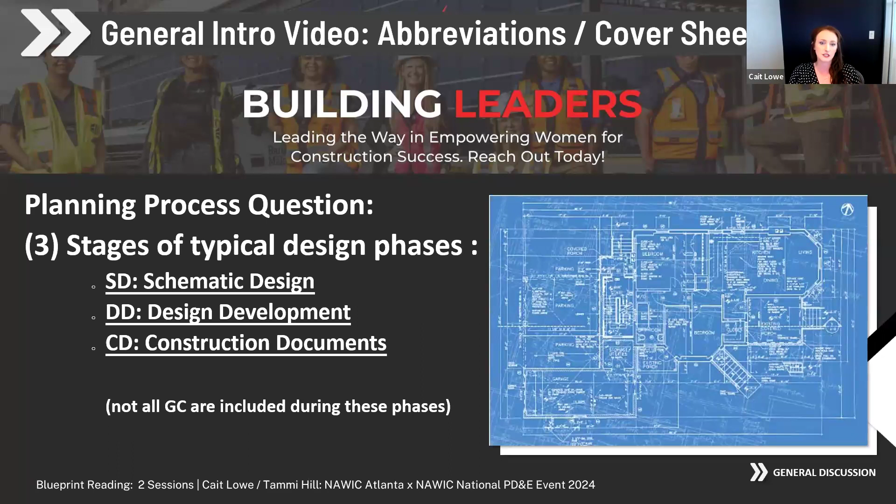And then the most popular that most everybody on this call should see is your CD set, or your construction document set. And that is a set that's already gone through all of planning, review, zoning for what we call authority having jurisdictions, that's your state, your county. It's already been looked at and approved by all your architects and engineers, stamped and ready to go.

Every discipline set, so that's either your G page, your A page, your structural, or your MEP, they're all going to have different immediate needs. So they're all going to have their own abbreviations. They're going to all have their own 00 page, which will give you basic information. And that is your engineer, your architect specifically saying, hey, contractor, hey, GC, hey, supplier, don't miss this. This is only for this set. So you're going to see the A pages have their own set of abbreviations.

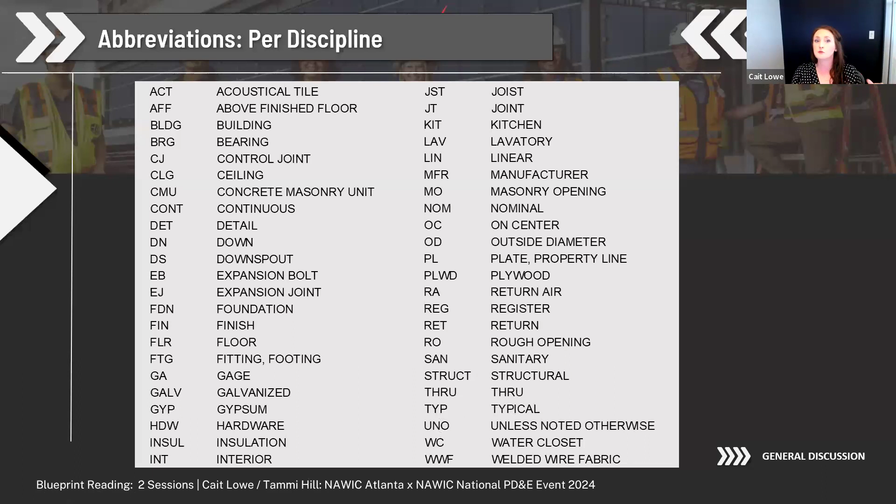So just a couple examples. ACT is your acoustical tile ceiling. AFF is above finished floor. Some really standard ones that we'll see is TYP, typical, or UNO, unless noted otherwise. Those are kind of your standards that you're seeing. They may or may not be used. They typically are boilerplate, but it's a good tip that you always want to snippet it, print it, save it, so that when you see it through your page and playing Where's Waldo, a detective, you're like, what is that? Oh, got it right here, ready to go.

So the other thing that I always really like to talk about with everybody is there are so many different viewpoints, right? So again, your architect and your engineer has to ensure that everybody is reading how to build this building the same way. So they will use the viewpoints based on that. So whether you have a CD set or a DD set, you're going to see different viewpoints. I did want to hit on all of these.

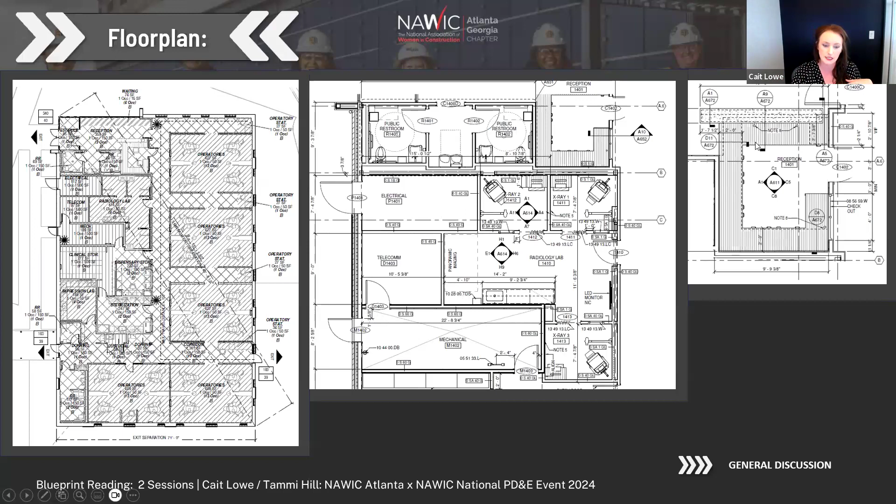And then we can even see, this is actually millwork. So it looks like a countertop and a sink. And again, all of these will be on your 00 page, and Tammy's going to talk about that, but I can see a door. So again, it's just lift up the dollhouse. And then this, I liked this one because it's actually millwork for a built-in desk for reception. So I thought that was a good one to show y'all also. So we're going to go through all of those.

So your most common view is the one we just talked about. So it's a plan view. Plan view is going to be your most common. It's looking down through the building as a horizontal slice, and you're looking directly over it. Okay, so I like the dollhouse assembly or drone or whatever y'all like to think about. So typically it is an X-ray view, as if you took the roof off and you put the ceiling off and you're hovering right above. So you can see walls, flooring, millwork, like we just talked about, equipment.

A lot of other times you're going to see different plan views, really common on the A pages or the architectural pages, and that's your roof plan where you're hovering right above the roof so you can see what's sitting on it. It's still a horizontal slice, but it's not really an X-ray slice.

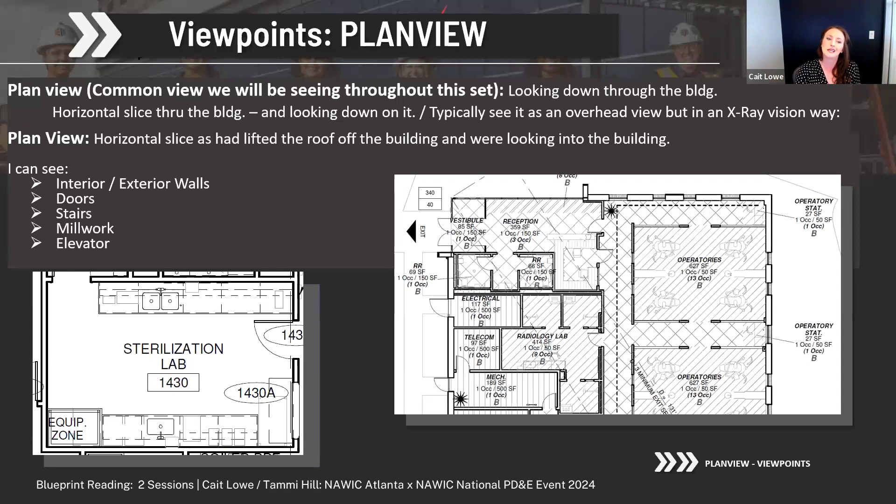Right, and then we have elevation view. So your elevation view is a vertical slice, right? As if you're standing directly in front of the building, or you're standing in the parking lot, you're standing right outside the door. So it's the exterior vertical slice, and you can see the interior elevations. You can see from floor to the roof, it tells us it's 14.5, and then to this roof screen, from 0, it's 23.3. So he gives us information, top of canopy, top of window, top of door.

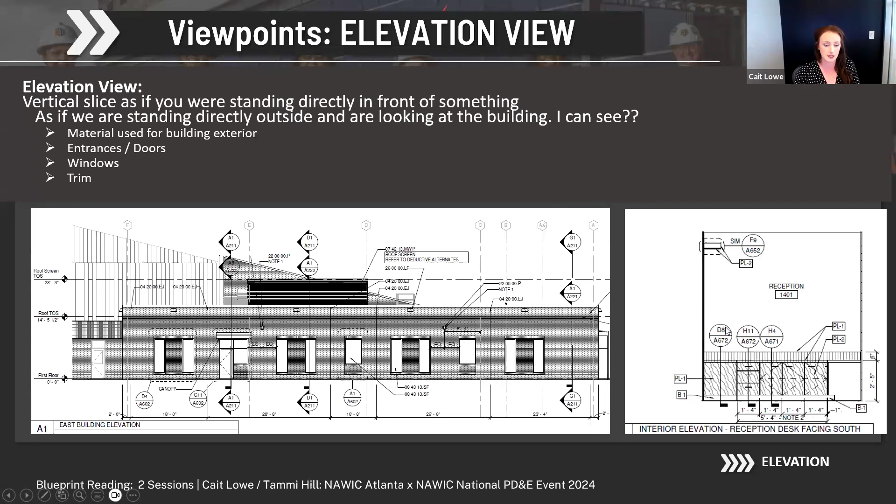But really what your elevation view is showing you is what the building's supposed to look like. What is the intention of the architect for this building to look like? And then we extrapolate or get some deeper information also from these pages. So this is an exterior, and then this is an interior. So again, your interior, this is that reception desk that we talked about. So it shows you it's got cabinets, it's got drawers, it's got plastic laminate top. So it's same POV, it's just inside the building versus outside the building. And this will always tell you the design aesthetic that they're going for.

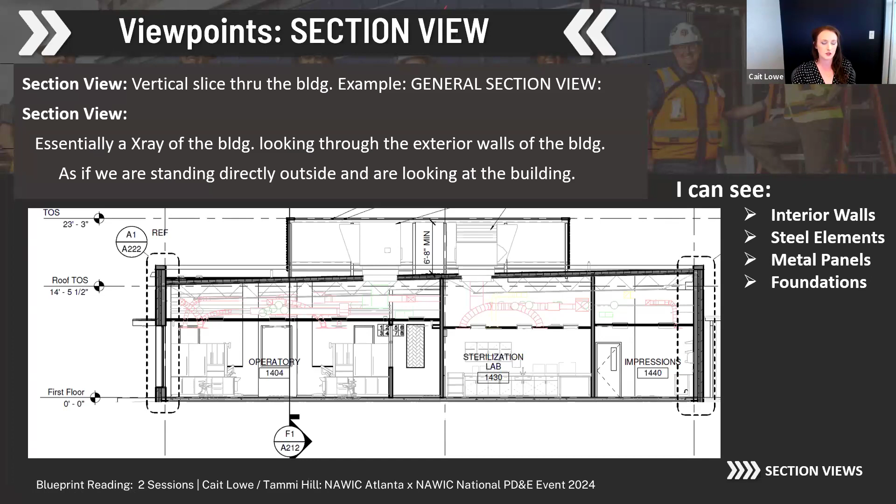The other viewpoint you're going to see is a section view. So that's an interior elevation, vertical slice through the building. So this is definitely X-rayed, right? So all we're looking at is what is X-rayed in the building. So again, it's sliced as if we're looking straight through with X-ray glasses. So you can see ceiling height, structural height, or any indicator that the architect wants to bring forward. Section views, again, it's a vertical slice, but it's a more minute part of the building. So it's essentially looking at an itty bitty part.

So I extracted this. So it showed us this whole exterior wall. And then it showed us another piece of the wall and then a further detail piece of the wall. So if we're looking at this from the elevation view, I don't have a lot of detail about the material. But if we go next, I do get some more information, and there's going to be a legend and an abbreviation for all of these. And then Tammy's going to get into all that.

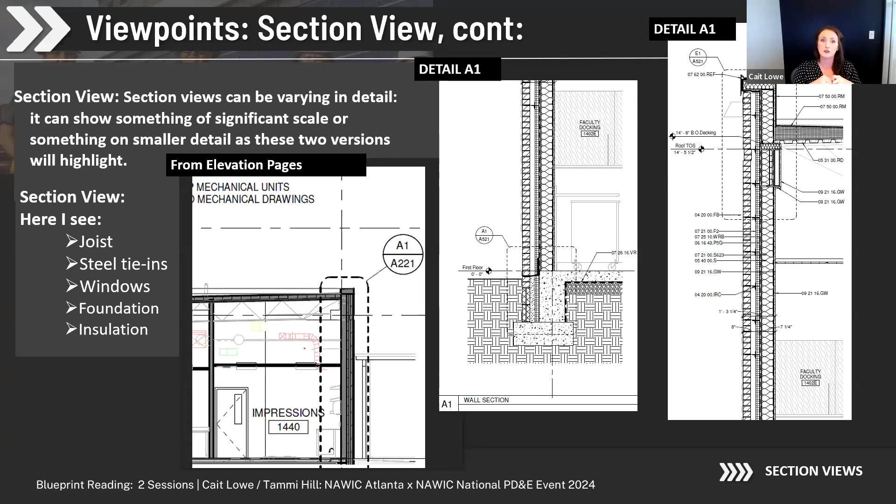But what you can see is joist, tie-ins, windows, foundation, insulation, waterproofing. You've got multiple sub-trades here. So that's kind of a way for an architect or an engineer to say, again, hey, contractor, don't miss this because you got 4 or 5 trades all in the same area. So by them zooming in to that section view, it's telling them more detail on how to construct it.

A section view is going to be more of a finite detail than an elevation view. And an elevation view is different from the plan view. That's where we're looking in and dollhouse up. So again, we're playing Where's Waldo throughout, but these are where you find your clues. So if you skip over the detail in the sections, you're missing money.

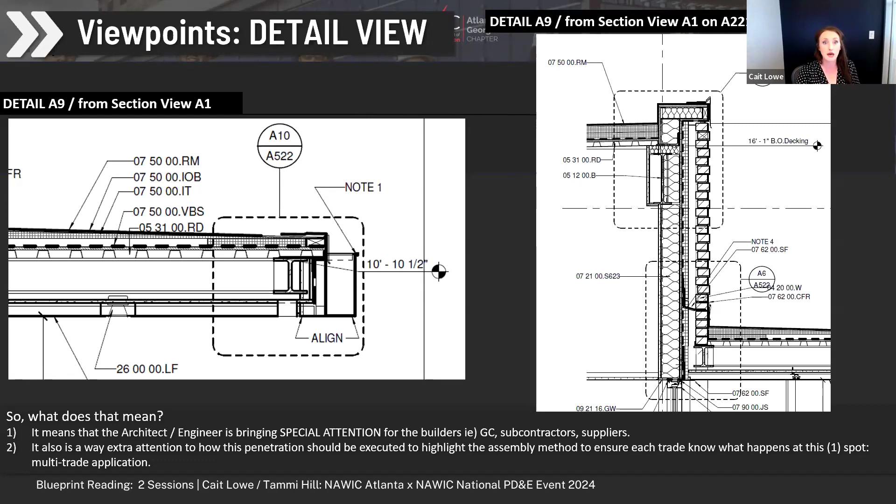Okay, another thing that we're going to see are schedules. So the most common schedule are room finish schedules. It'll tell you room number, room name, flooring, wall finishes, and then door schedules. So again, it'll give you door information, a lot of different door types, hardware schedules.

Every discipline will have its own set of schedules. Your mechanical schedule is different than your electrical schedule. Your finish schedule is different than your roofing schedule. Your roofing schedule is different than your steel schedule. So you're always going to look in those specific disciplines.

But again, that's just a way of the architect and the engineer saying, hey, Mr. Contractor, Ms. Contractor, do not miss this. This is important. It's just for you, very project specific.

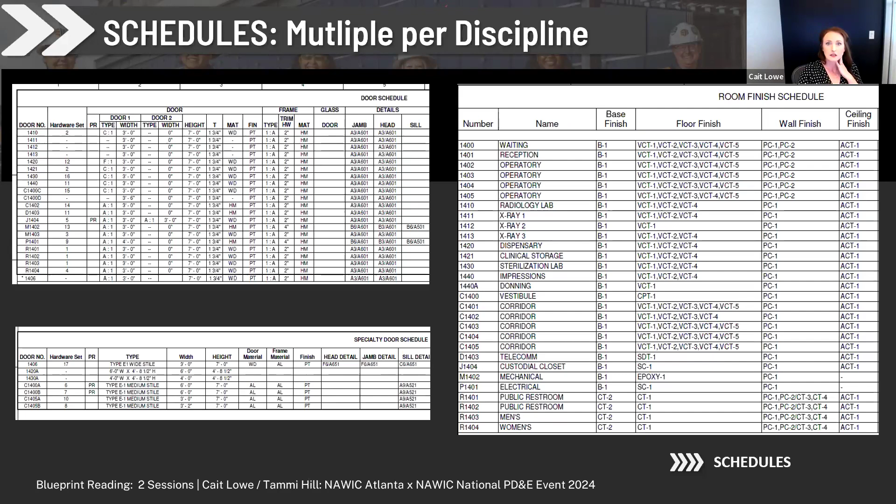Thanks, Cait. So now we're going to jump into the actual drawing set. We're going to be looking at a live PDF set, and today we're going to be covering the architectural and structural drawings out of this set. So please do put on your calendar and join us April 9th for our next session, where we'll be taking a deeper dive into the mechanical, electrical, and plumbing drawings.

So the architectural set that we're going to look at first, that is where we're getting all of our building organization information. The architectural set is going to show you the space layout. It's going to show you where the walls go, what materials the building is made of, and how you get in and out and move around the building.

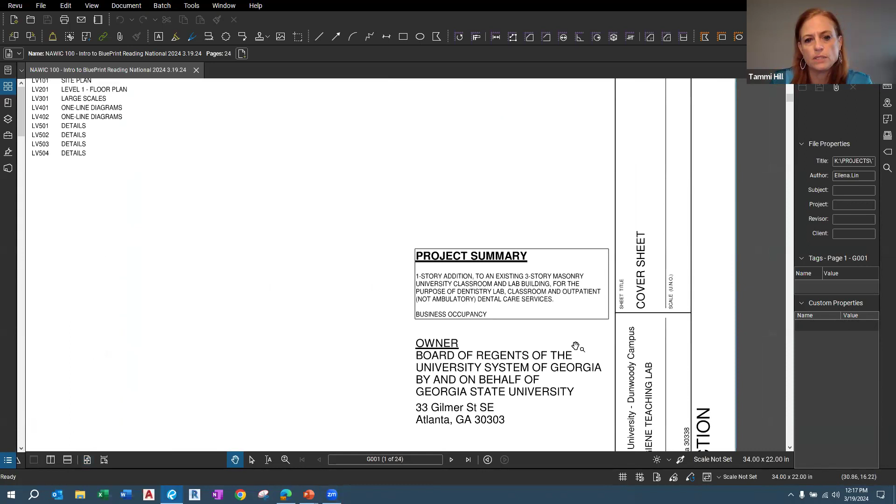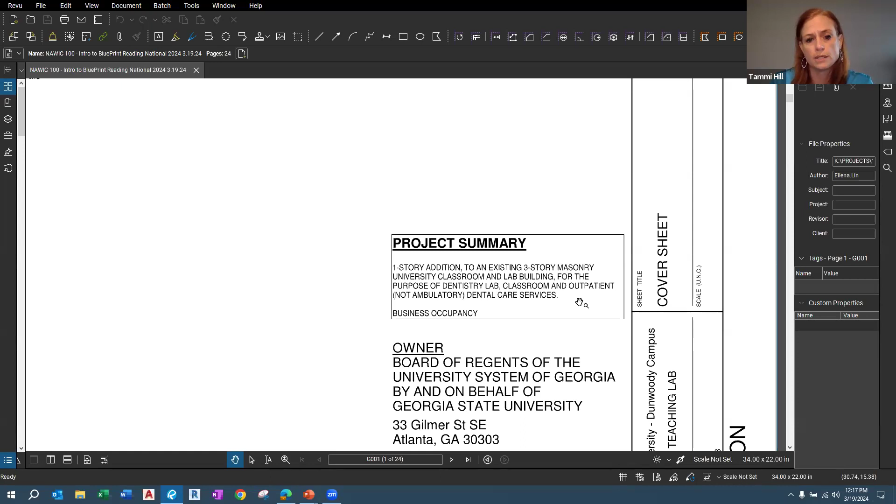So Cait touched on the cover sheet, a lot of really good important information here. One additional thing I wanted to note, sometimes this is on the cover sheet, sometimes you'll find it on the life safety sheet, but the architect will typically give you some sort of project summary, which is just a general description of what the building is. So in our case, we know we're building a single-story addition to an existing building. So that's what we're going to be looking at today.

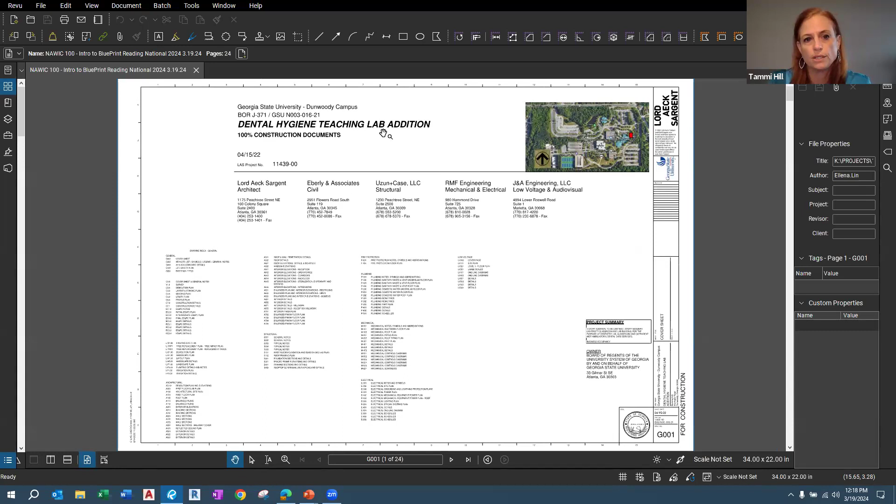And we know this is a dental hygiene teaching lab. So those are some clues as we're looking at things and wondering what is that? We can be thinking about what would you find in a dental lab, or at your dentist's office. So this is what that full page of abbreviations looks like. Really important information, and Cait's absolutely right. You want to have this handy at all times as you're flipping through this set, because you're going to be referring back to these abbreviations a lot.

It's also important to note these symbols and this legend here. This also gives you additional information about what you're looking at, what these different tags mean. Building components are going to have different tags that can tie back to schedule information that Cait was showing us, that gives us all of that additional information. So it's important to know which specific door are we looking at when we're looking at the door schedule.

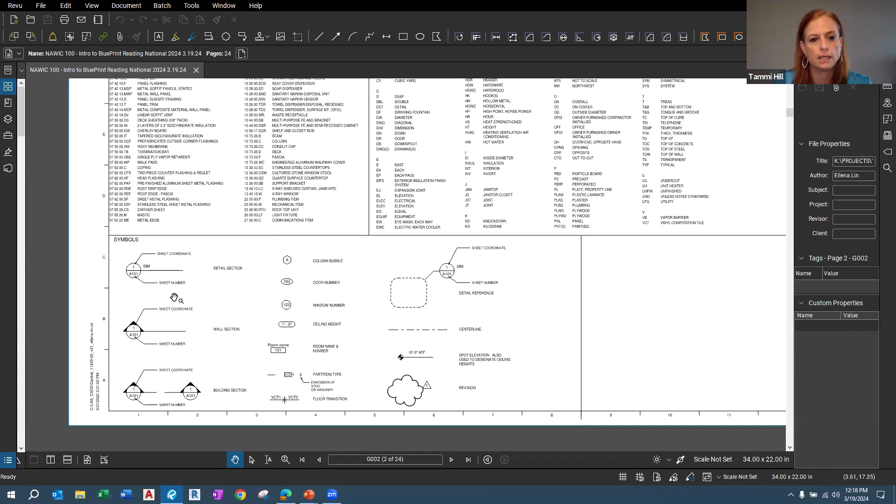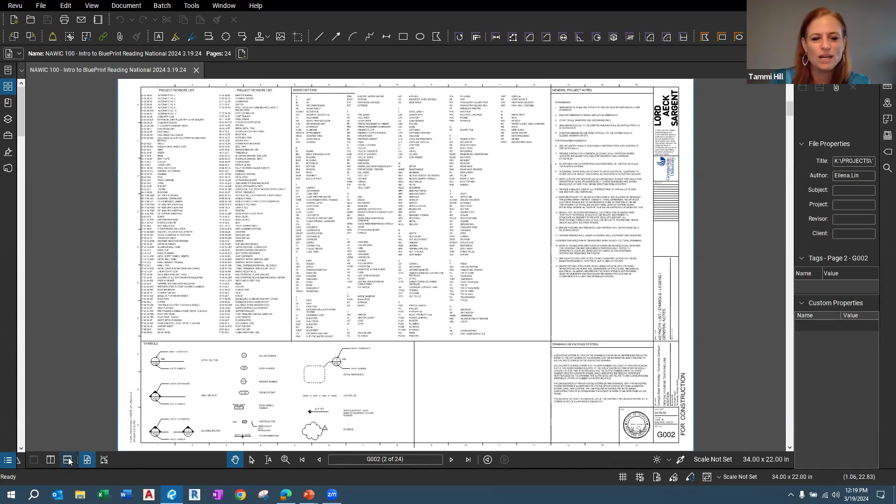And we can see where those section cuts are taken, where those slices through the building are taken, and where the elevations are, which wall exactly are we looking at. So really important information on this sheet. A lot of these symbols are industry standard, but it's important to make sure you're always looking at your project specific ones, because as architects, we do like to occasionally get a little bit fancy. So it may not be consistent from project to project.

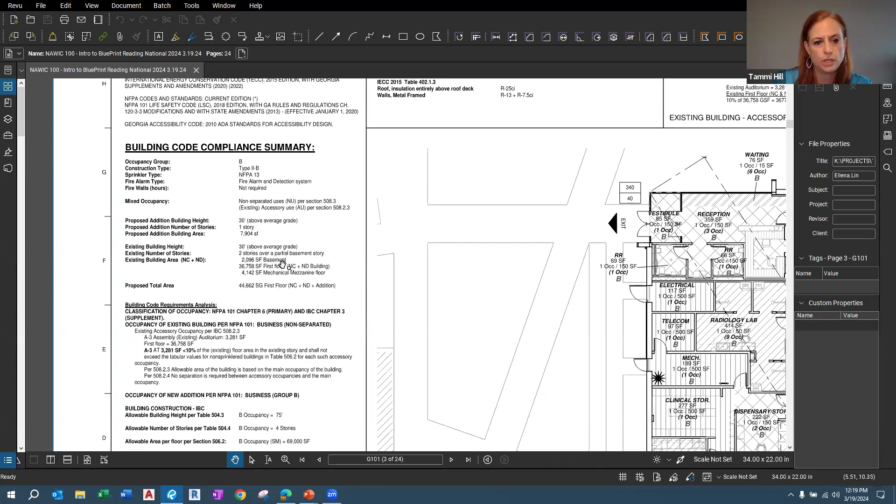So this is your life safety plan. And there's a lot of good information here. It's not just code related information. It shows you the general arrangement of the building. It shows you how you're going to get in and out of the building. But there's also good information about the building itself, about what construction type it is. And you can also find your square footages here. So if you're doing takeoffs or estimating, really good, quick and handy reference information to find on this page.

Now our overall floor plan. So this is showing us, again, that dollhouse view. We've taken the roof off and we're looking down on it. So this information is showing us our layout. It's showing us our dimensions. It's showing us where the walls go, what the walls are made of.

We've got some tags that reference back to schedules that show us the door and window information, and it's going to be providing us the locations of references where we can find more detail.

Now, the important thing to remember when you're looking at these sets, there's a lot of information here. There's a lot of lines, symbols, and tags. When you're first looking at it, it can be really confusing. But the important thing is just remember, take it one piece at a time. Allow yourself time to flip back and forth through the pages. You're going to be doing that a lot as you're looking at the different sets, going to look at granular detail, coming back to the floor plan to orient yourself, moving on to the next piece. So really allow yourself that time.

So here we see we've got some section cuts that show us the slices through the building. We've got some elevation views that show us, as we're looking at the building at that exterior wall, we can see those symbols. We can also see these dashed lines highlighting certain areas that show us there's some additional information in an enlarged view with more granular information. So when we're playing Where's Waldo, we like to think of these as our side quests, where we can pick up some extra coins and really get a lot of extra information.

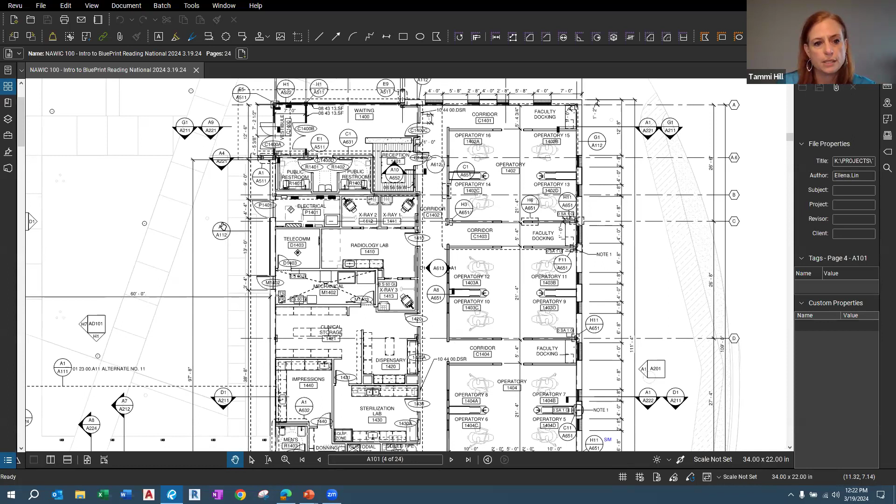So here's your Bluebeam hack for the day. If you didn't know Bluebeam could do this, you can ask your architects when they print the set to hyperlink, to check the box that hyperlinks all of their tags. And what that will allow you to do is click directly on the tag and it'll take you straight to that page. So that's super handy when you're trying to save time flipping back and forth through all of the pages.

So we were looking at that G1. We can see here in our detail title, we found the G1. It's an enlarged plan, so it tells us what type of view it is. And we can see here, as we're looking at this, now we can start to see some graphic representation of our different materials. We can see our doors.

Our doors will typically show us the swing, so it shows us which way the door is opening into or out of the room. We can see our tags a little bit more clearly now because we're looking at a larger view, so things are a little bit easier to see.

We can also see some of our windows, so we can see what our windows look like. We have two different types of windows on this project, so they're shown slightly differently, but we can see that graphic representation. We can see our mullions here, which are the vertical or horizontal pieces that hold the different panes of glass together.

We can see our wall types, so we've got some tags that reference what our wall types are. And as you look at these different notes, you'll also see that there's some specific notes.

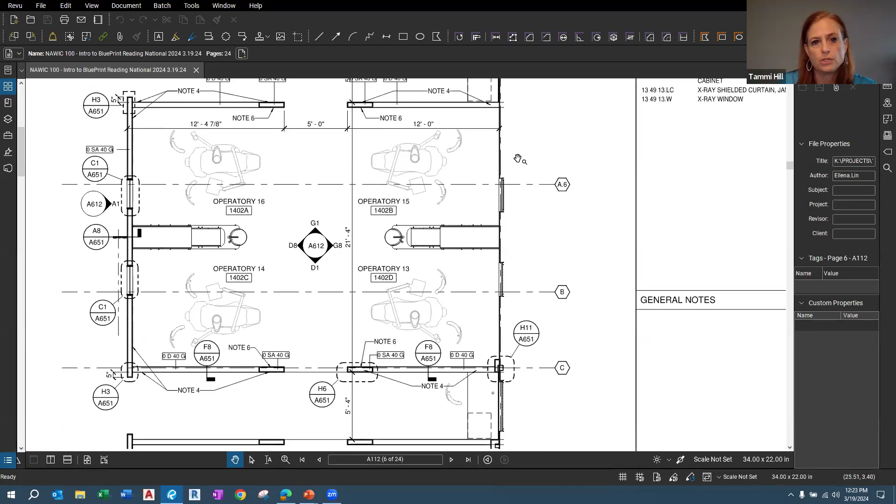Now, what's important to know on each page as you're looking at it is that there are going to be page-specific or sheet-specific notes and keynotes. So in this case, for example, this says note number 6. We know we have some sheet-specific notes. We can go here, see note number 6 is a coat hook. That's important information. It may seem like a minor detail, but when the building is finished and the owners walk in and don't have a coat hook, they're not going to be very happy.

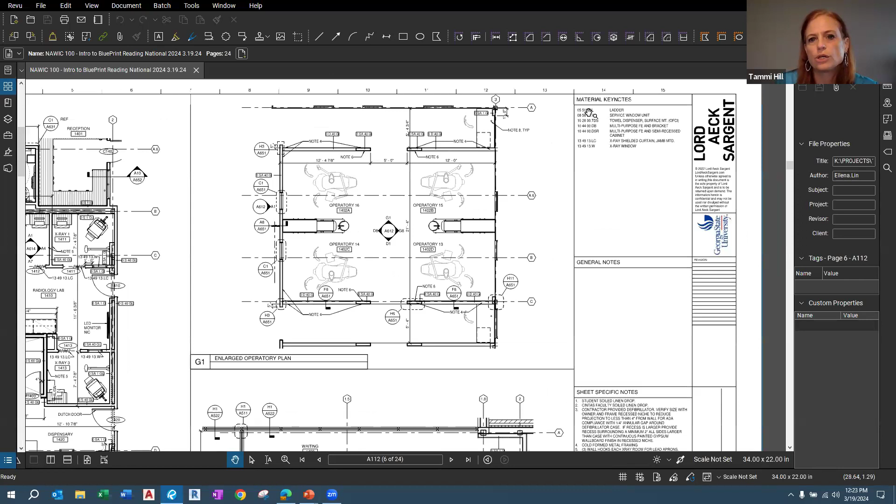So it's really important to pay attention to the sheet-specific notes and then look at your keynotes. Keynotes are what the architect will use rather than having to type out the same note every time and really clutter up the sheet with a lot of words. They'll use keynotes and then provide a legend that tells you what the different elements are that they've noted. So do pay attention to those items.

Again, we're drilling into greater detail now. So we talked a little bit about this, the millwork that Kate highlighted for us earlier.

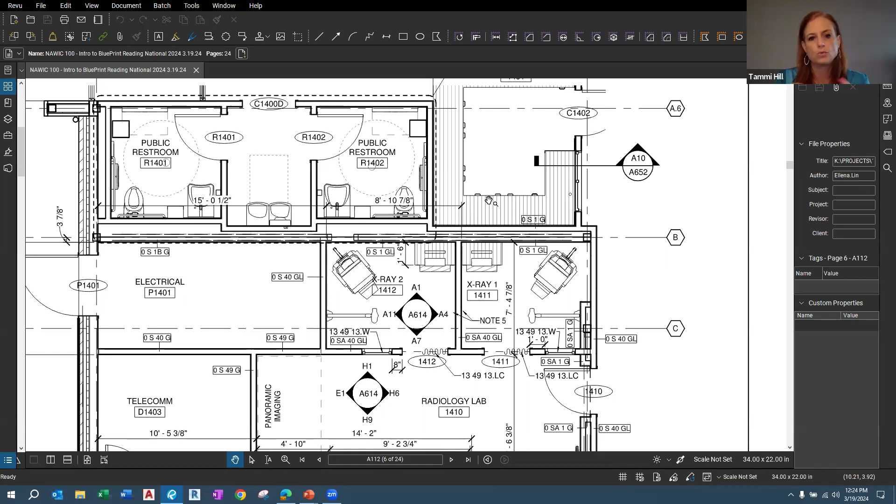So you're going to see a lot of dashed lines on the drawings, and they all kind of mean different things. It could mean something's not in contract, it could mean it's something that's overhead, or it could mean something that's down below. We'll also use dashed lines as architects to show what our clearances are for accessibility. So it's really using that drawing set as a whole that gives you the clues to understand what the particular dashed lines mean for each thing.

So in this case, we know there's going to be an interior elevation of this millwork. We looked at it a little bit earlier. You may have caught that there were some section cuts that'll give us some more detail, so we can drill down into those specific components to make sure we understand what all those dashed lines are referencing.

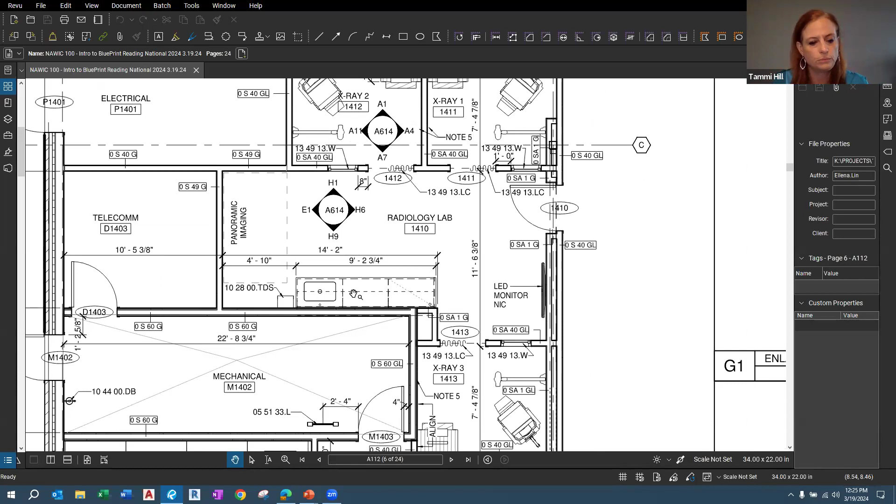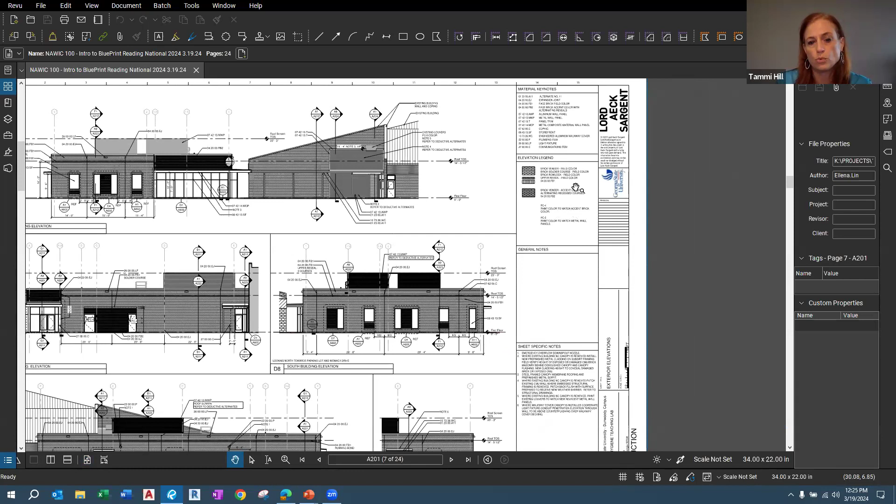So now on our elevations, we're going to flip over to an elevation view, which Kate talked a little bit about earlier. This shows us our building heights, so we have some actual heights noted, and it shows us our materials. Again, on this sheet we have specific keynotes, as well as a specific legend that tells us what our different materials are. So when you see the different kinds of hatching, you can see exactly what types of materials those are, as well as typically what colors. Those are the kind of things that architects will note on elevations.

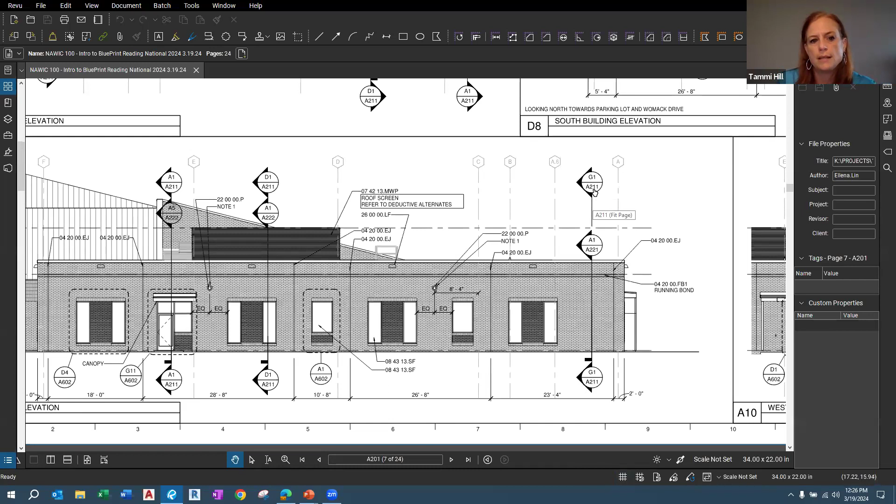Another industry standard thing to know: when you see section cuts, if you see a double-headed section cut, both of these reference the same one, that G1, that is actually a building section. Wall sections are going to be noted with a single head and this short little stubby tail at the end. So that's a clue as to how to tell the difference between the building section and the wall section. So we're going to jump over to a building section, which is this D1.

Right here in the middle we found our D1. We know it's a cross section, and again, this is a slice through the building. So this gives us a sense - we looked at the plan for a sense of the layout arrangement, so the sections give us a sense of the vertical arrangement. What is the space doing vertically? What are the different ceiling heights doing? We can also start to see some of the building structure here, getting a little more detail.

And we can see the MEP system here above the ceiling, all of the ducts and the pipes and everything that's running up above the ceiling. Not necessarily typical for an architect to show this, so you may see it, you may not. But please do join us for our next series where we dive into a little bit more on that MEP.

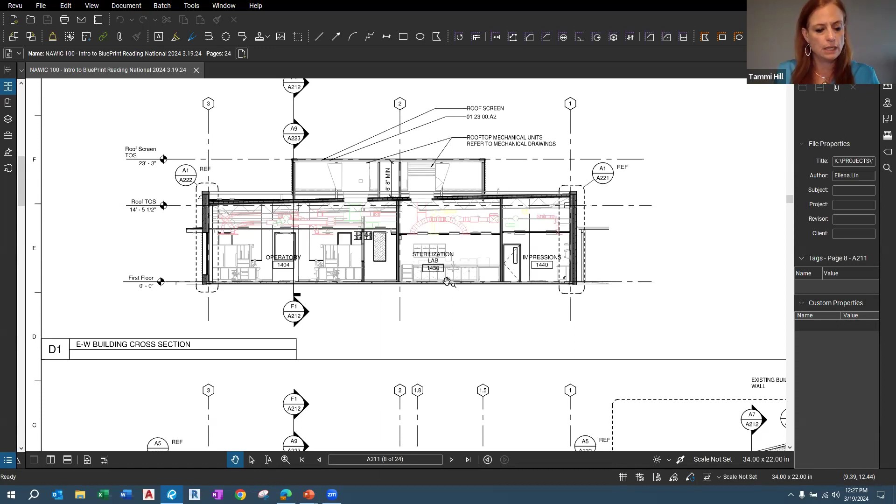So now we are going to go to a wall section. The building section kind of gives us a big picture view vertically. The wall section, as Kate mentioned, now we're drilling down even more into that detail and gives us more detail about what the actual wall is. So this is a vertical slice just through that wall.

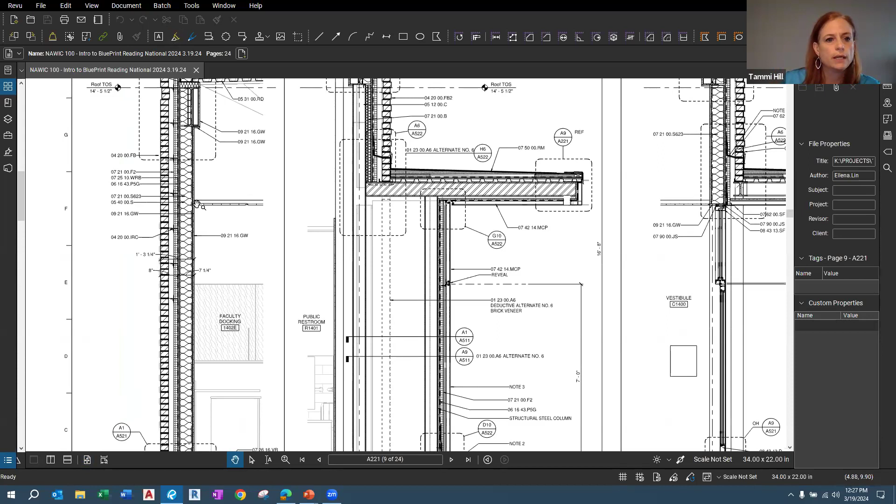Again, can be confusing, a lot of information here, but we can rely on our keynotes to see what our different components are. We know we've got some batt insulation, we've got some gypsum sheathing, we've got some studs, we've got some sheet specific notes to pay attention to. So now we can start to see really how that wall assembly is being structured and what the different layers are in that wall.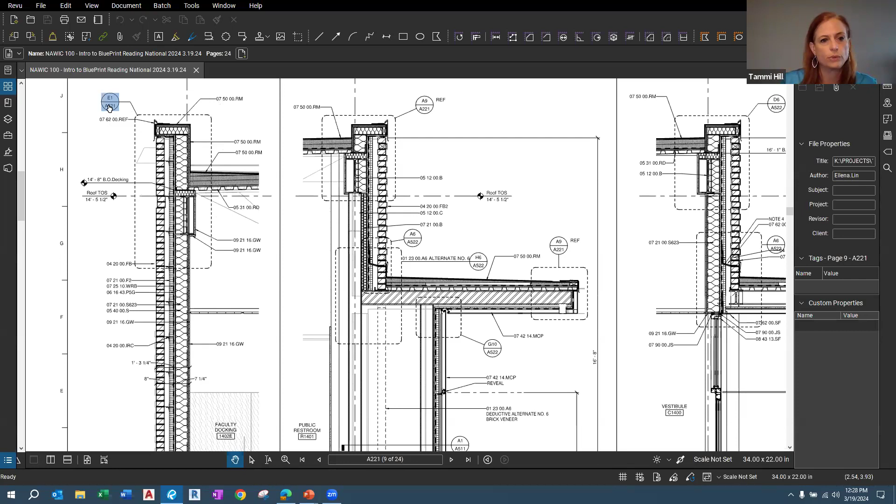And then we can drill down even more. We have some enlarged details. So we have a clue here, right? This is that callout that says, hey, there's even more detail if you go and look at this specific detail. So if we click on that, we can now see we're getting even more detail. This shows us how all of the connections are being made and how everything is being finished. We can see the structure here, we can see how it's being finished.

So again, as we get deeper into the set, we get to see more and more detail. Our details are kind of big picture details here. These enlarged details can be either a plan, a section detail like we see here, or it could be a plan view. So you may see on a floor plan there's a callout for a small area, and it can show you how a lot of different walls are intersecting and how those connections need to be made.

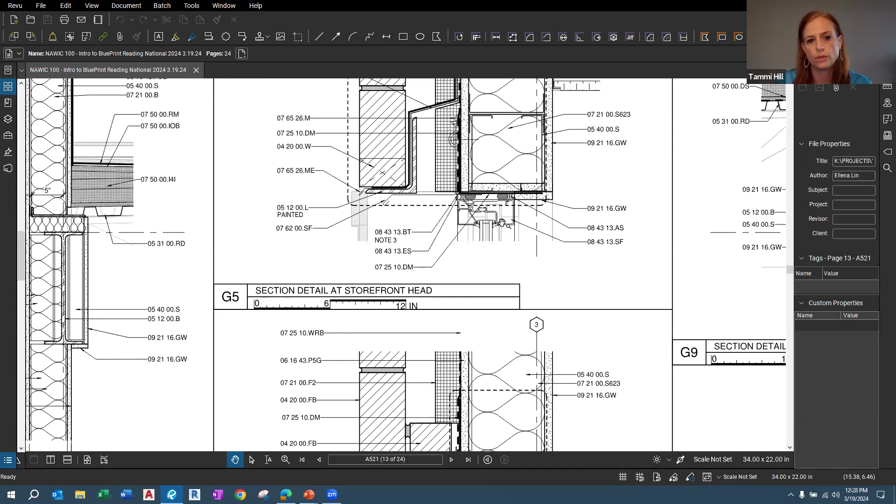You'll also see details for how windows are installed. So we can see here how the window is going to be installed and how it's going to be made watertight. So we've got some caulking and some different things going on. So all good information to have.

So we touched briefly on schedules. Again, we have more detailed information here. So the schedules are really specific information about specific components of the building.

So in this case, it's the door. We saw the door tags on the floor plan. Now we can come to the schedule and say, okay, that door 1410, we can see a lot more specific information about that door. It gives us information about what kind of hardware it has, how big the door is, the width, the height, what the door is made of, and the finish of the door.

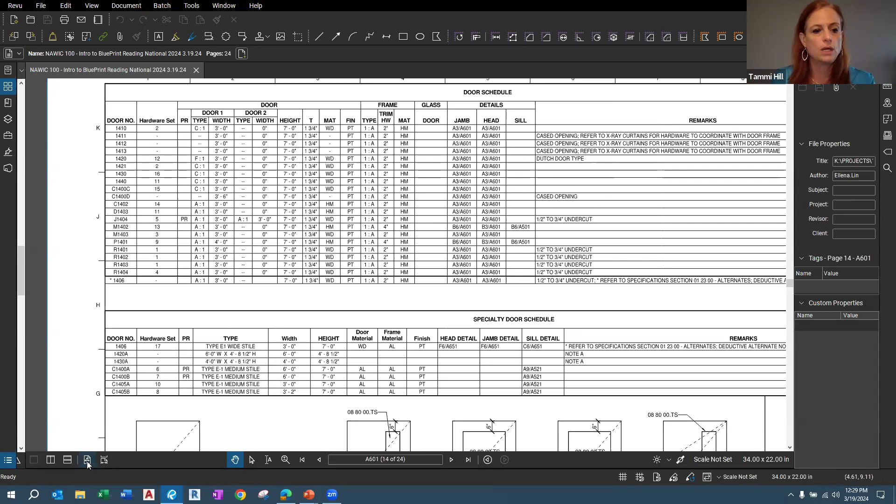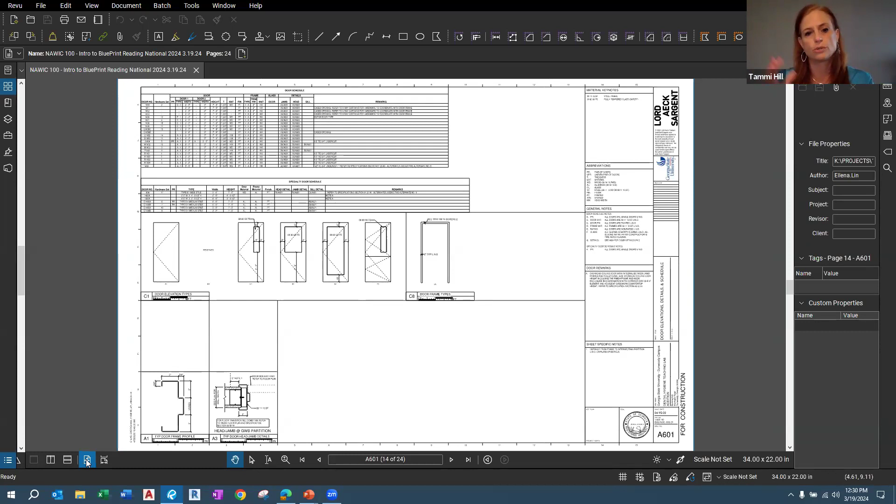Really specific information that you're not going to find elsewhere in this set. As Kate said, each discipline will be scheduling different things. In the architectural set, you'll see door schedules, maybe a window schedule, a schedule for all the room finishes that tells you what goes on what wall, what paint, what carpet, what ceiling. Then the other disciplines will be scheduling their own specific building components, so MEP scheduling equipment, structural scheduling their columns and foundations.

So we'll flip over now to the interior elevations. Just like our building elevation view, now we're standing inside the room and just looking at the wall and seeing what's going on that wall. So the interior elevations will show you things like wall coverings and finishes. If you have tile, it's going to show you where the tile goes. It's going to show you plumbing fixtures and what various heights those need to be mounted at.

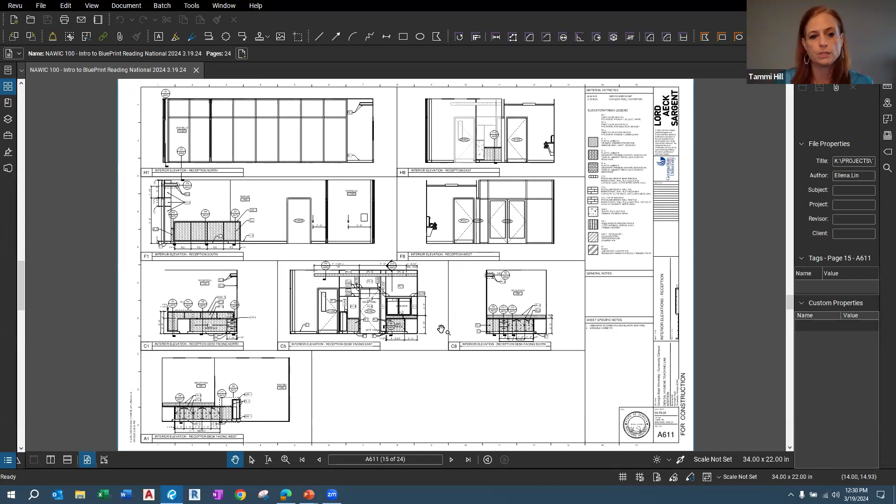And in our case here, we've also got some millwork or cabinetry that's going in. We looked a little bit at the reception desk. We can see we've got some dimensions and some information on finishes. Again, we have a sheet specific legend that we can look at that gives us those Where's Waldo clues to know what those different materials are.

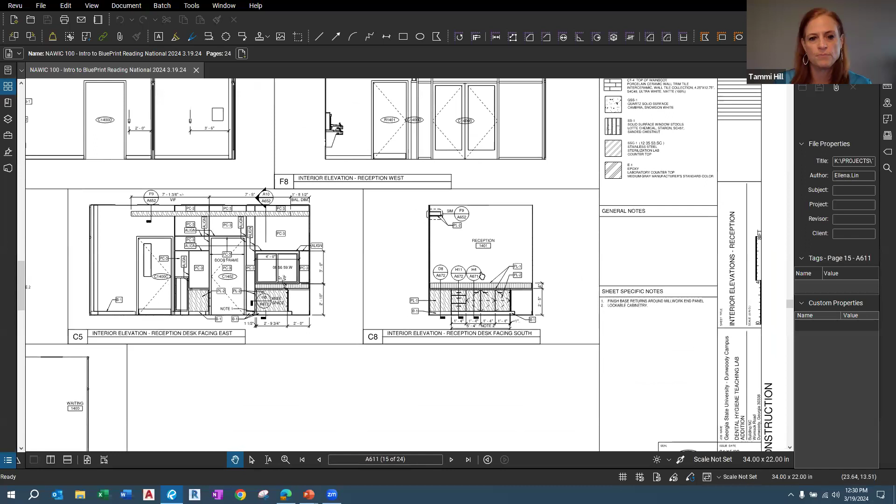And again, we can see we've got a call out for a section that shows us even more detailed information on that cabinet. If we were to go to that, that's H4. Now we can see how all of those pieces come together and how that cabinet is supposed to be constructed. So again, as we get deeper into the set, we're getting more and more granular on that information.

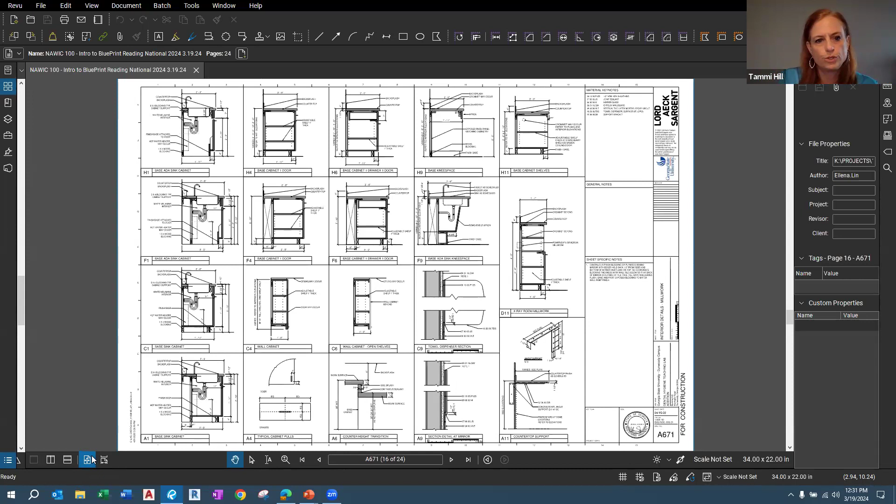As Kate said earlier, each discipline is going to have their own specific set of abbreviations, so what you see on the architectural drawings may not apply to structural or mechanical. Some may overlap, but some are going to be very unique. The other really important thing I want to note about the abbreviations is just because you see it on the page doesn't necessarily mean it's going to be in the set.

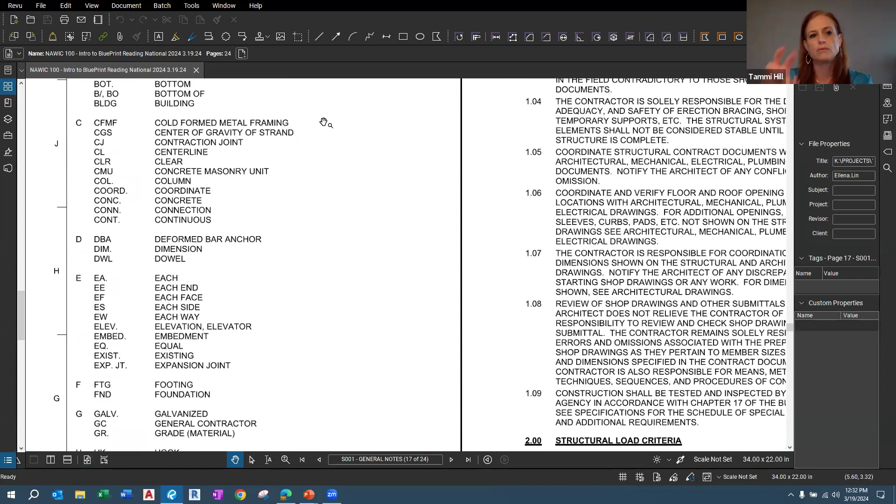For this example, cold formed metal framing doesn't necessarily mean we have cold formed metal framing on this project. This is really your reference back, so that if you saw that CFMF anywhere in this set of drawings, you can come back to this and see exactly what that is.

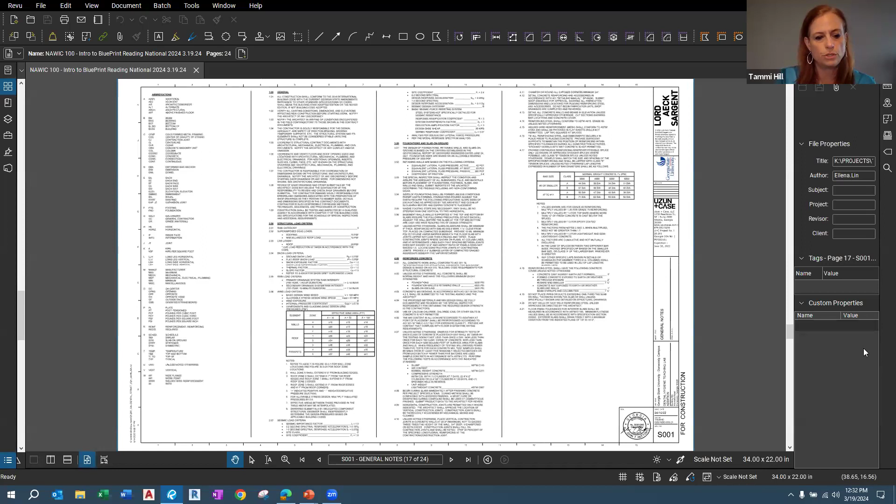So Cait, I'm going to let you jump into the concrete and the foundations. Perfect. Thanks, Tammi. Okay, so I'm going to grab over here, screen share. Sorry, guys. Hey. All right, so can everybody see this page? Yes. Tammi, can you see it? Okay, perfect, gotcha.

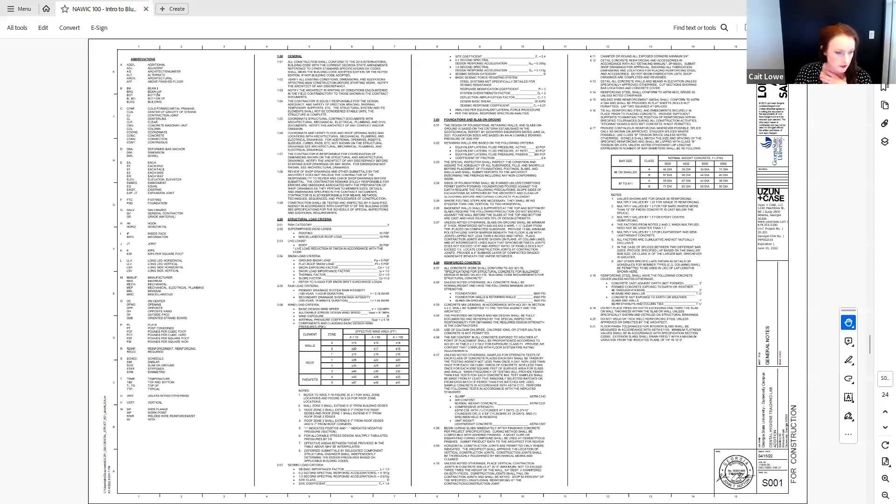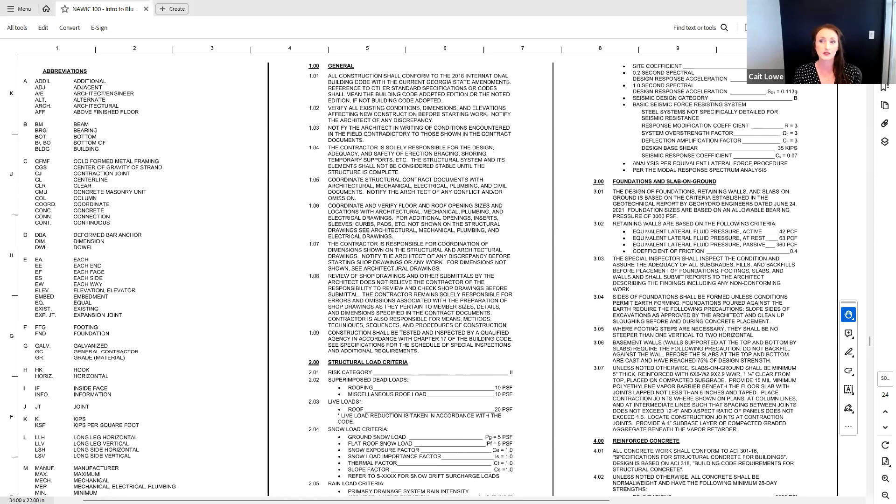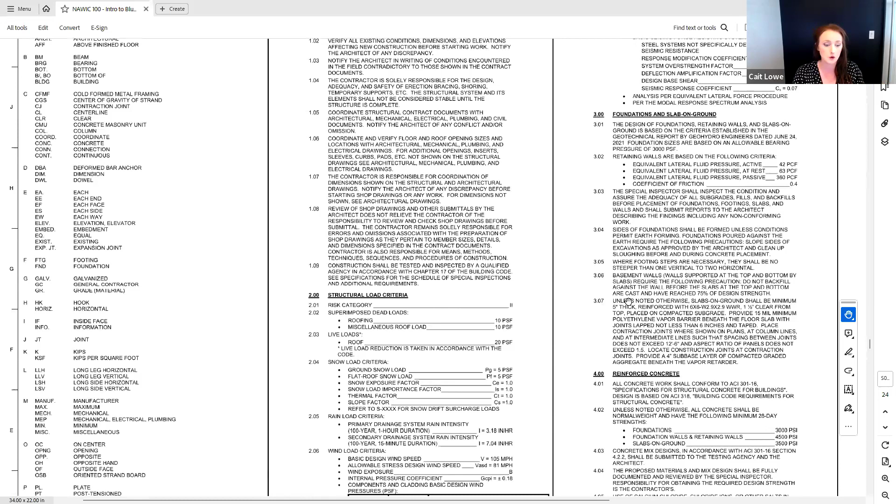I'm going to talk about concrete. So he'll talk about everything that is absolutely crucial, necessary, and an absolute must in regards to concrete. So you'll see, again, multiple trades mentioned. So on structural pages, we're going to see concrete contractors, roofers, waterproofers, steel erectors, wood framers, masonry, but also your MEP subs are looking at these too to make sure that they have weight distribution for the skeleton of the building for really heavy materials. So we'll see that also.

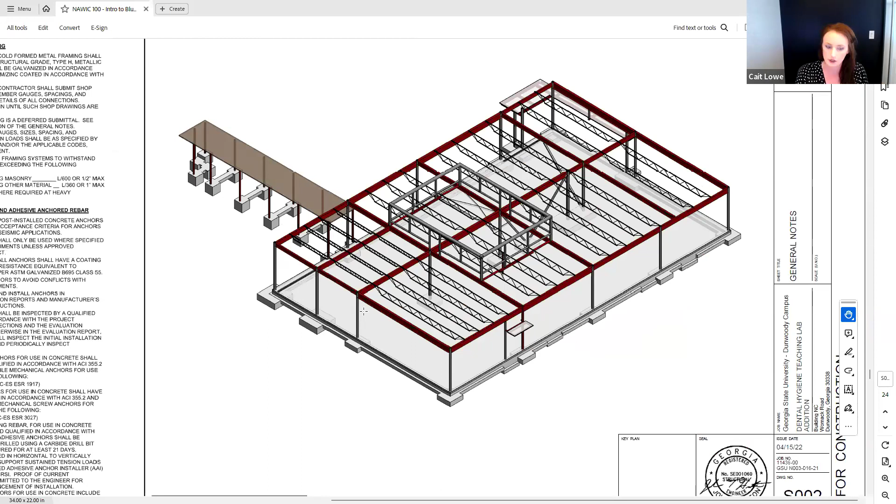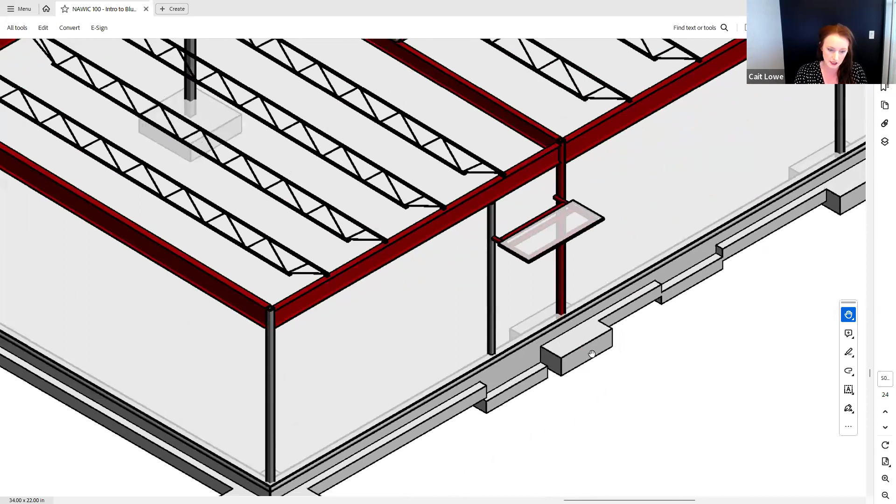So we can see the concrete foundations. That's what these are going around. So your concrete foundations, and it's got a turn down foundation. Okay, so it's just going all the way around. You can tell that it's really here to support the steel and the roof. And then it kind of dips down, which tells me something's happening there. So I'm like, okay, mental note, where's Waldo?

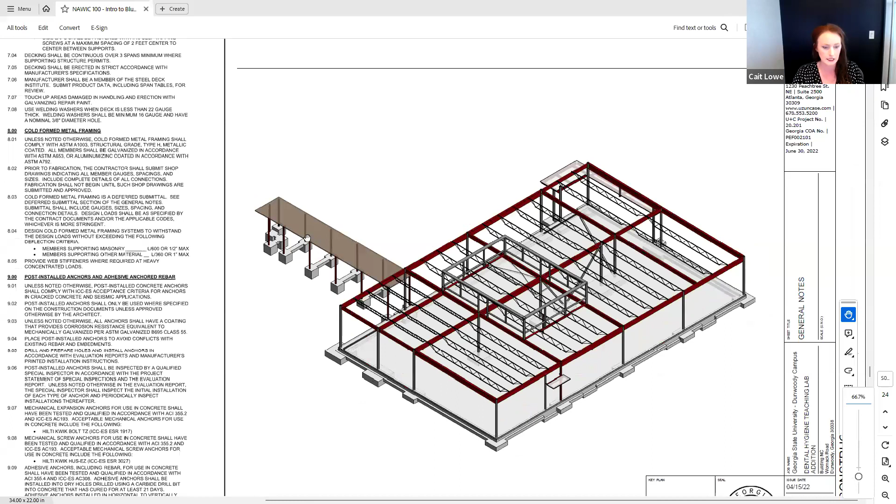Figure that out later. And then we've got the slab on grade, and then the canopy, it has its own footers. So even by looking at this without looking at anything else, I can tell the bones of this building. So I'm like, okay, got it. It's steel, it's concrete, it's canopy, amazing. So don't let these intimidate you, okay?

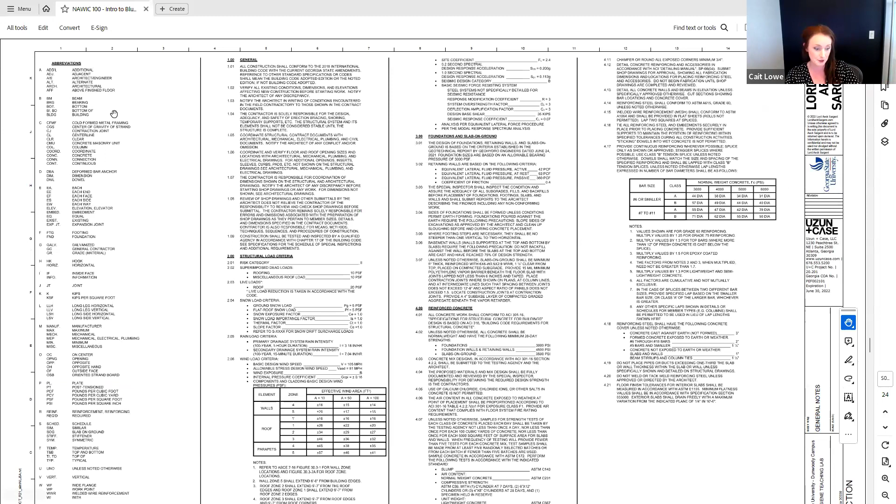So again, you're gonna take that S00 page, you're gonna snippet this, hold it off to the side, print it, and so when you're looking at this, you know what these are, right? Okay, so it does give me a little legend. So the legend is telling me the X-XX indicates the top of wall footing elevation, so where it is on top. And then this one is indicating a spread footing. So it's a column footing, right? And then it will tell you the top of the footing.

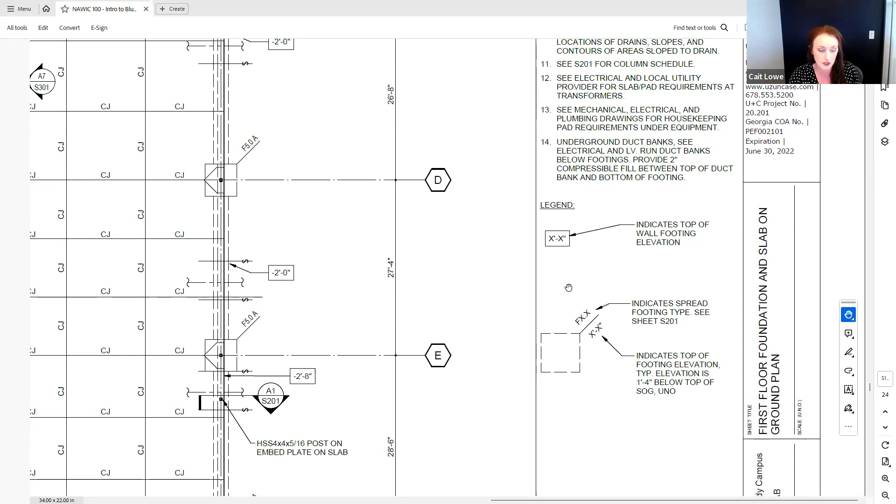And then other than that, I'm going to read through the notes really quick, find those where's Waldos, start marking them in color. But really what I want to talk to you guys about today is what we're looking at. So remember the isometric drawing right here. Okay, so we see these column footers right here at the canopy. And here now they are on that overview plan view, and I can see exactly what they are. So they're pre-engineered canopy columns. Okay, tells me the engineer, they're typical. It's going to tell me information on it.

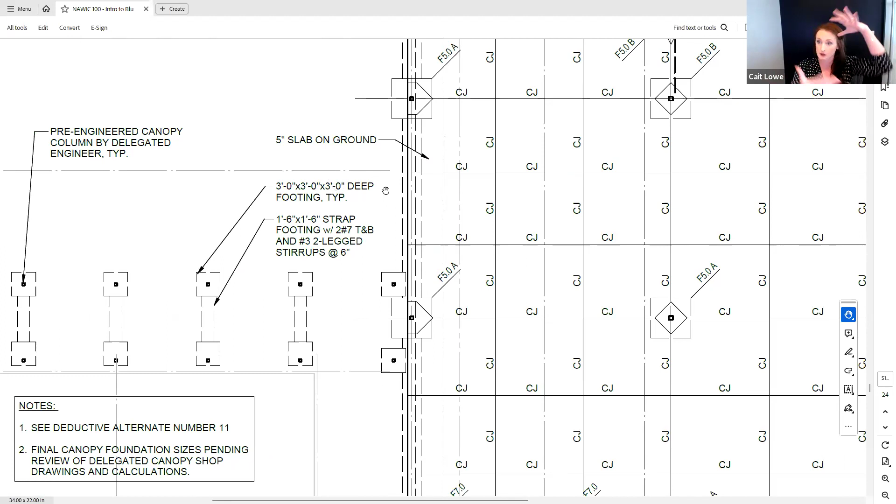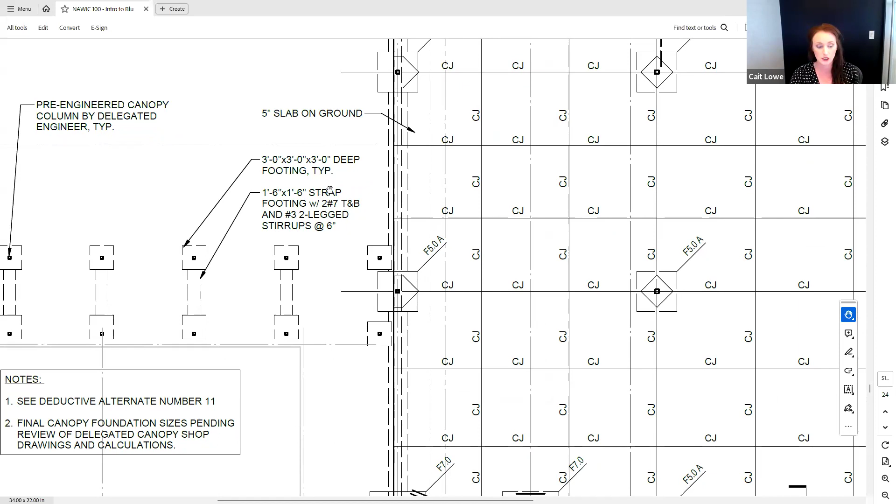It's 3 feet wide by 3 feet long by 3 feet deep. So 3 by 3 by 3. And then it tells me it's got a little strap, so it's connecting. And that is 1 foot 6 inch wide by 1 foot 6 inch deep. And then it's got some steel information. So it's rebar. So it's telling you the quantity is in front of the hashtag. So it's 2 #7, which might be, y'all don't worry about that right now.

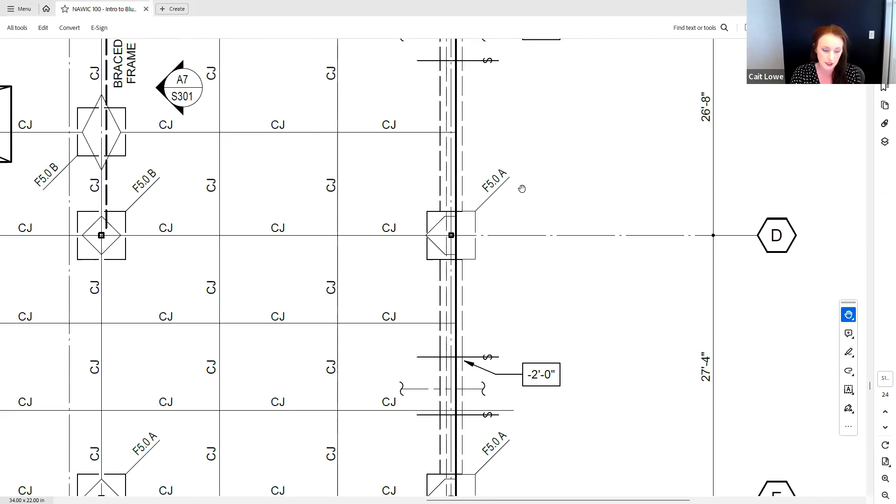Okay, so then we also see the slab on grade. Okay, so these are your individual footings. And I'm pointing as if you can see my hand. So these are your footers. Okay, and they have designation numbers. So this is footer F5.0A. And this is the exact same one. And this is F5.0A. So they're all the same, right? And then here's a different size one, F7. So I know, okay, that's a different kind of footer. So those are your individual column footers.

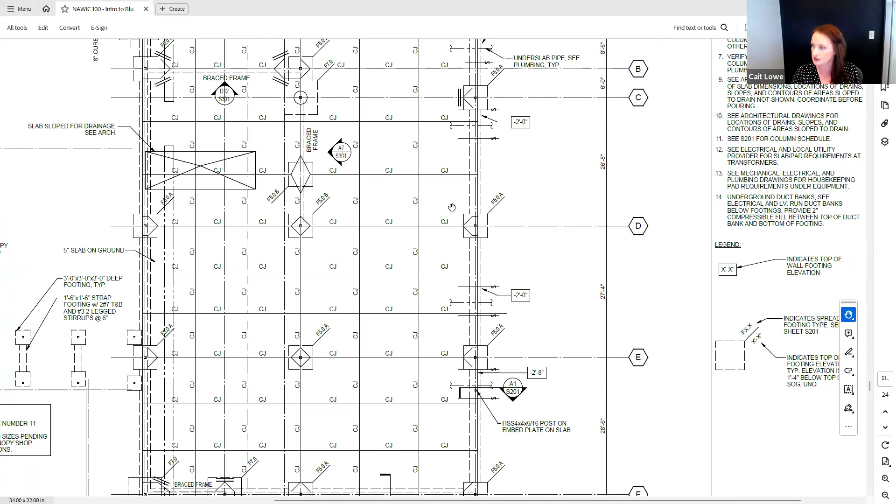So a column footer is a vertical structure that carries the load of the slab. So typically, we saw on that isometric drawing that it's holding up steel. So this is the location in which the steel is. So it needs some extra weight. And then from there, you'll see these kind of lines that go around the building. So those are called a turn down, and they'll have their own viewpoint, which we'll look at here in just a minute. And that's a deep foundation.

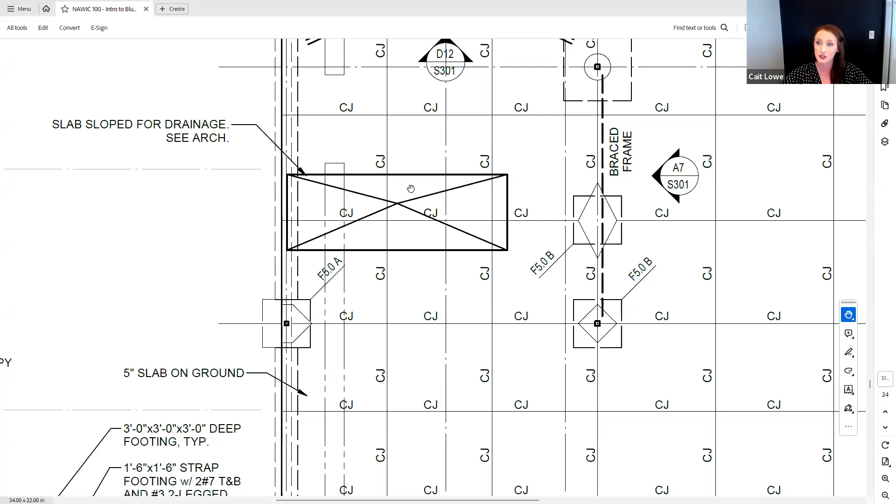So that's this guy that's running along the outside of the building, okay? So that's called a turn down foundation. And then everything in the middle is just your slab on grade. So you see something that's extra dark and kind of called out. It says slab sloped for drainage. That is your engineer saying, Mr. Contractor, don't forget this. It needs a slope. It needs a place for the water to go down. So it's got mathematical rise over run, using gravity built into the concrete to ensure that it goes where it needs to go.

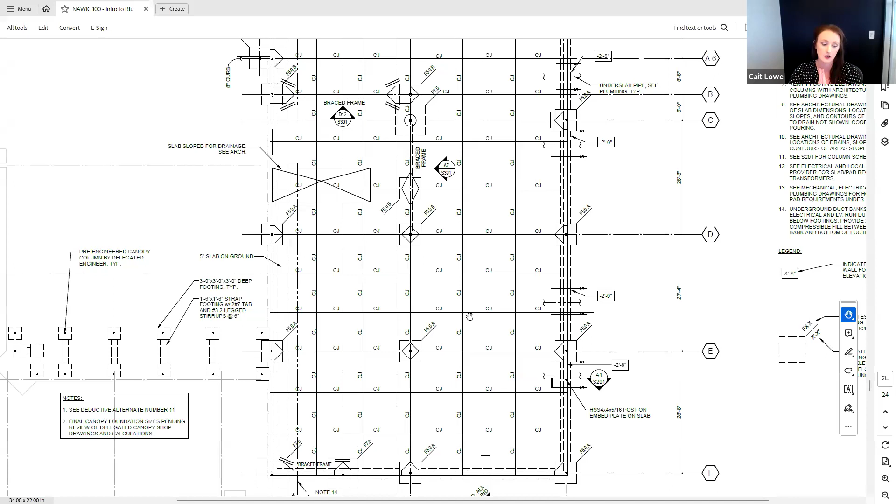Other than that, we would go and look at 2 pages up. We go and look at here, and I see that CJ everywhere. So I'm like, what is CJ? It's a contraction joint. Okay, cool. And then I see all the CJs. It looks like there's a lot of those. What is that? And so we would go and check that 00 page. But we know that concrete cracks, right? So we want a place for the concrete to crack. So by having that contraction joint or a control joint sawed into your concrete or embedded into your concrete, it's ensuring that you're not going to have big cracks in your building. They're hidden, so it's brilliant.

Tammy, you want to take it from here? Sure, I appreciate that. I'm gonna actually flip over to the set that I had so I can navigate around quickly. Oop, everybody can see I'm on Zoom.

That's good. So the next page that Cait had flipped to is our structural framing plan, and our structural framing is really our skeleton of the building. So we've talked about everything that's holding up the building. Now we're looking at what are the bones, literally the bones of the building. And again, this axonometric view is hands down one of my favorite because it really shows you how all those different pieces and components come together.

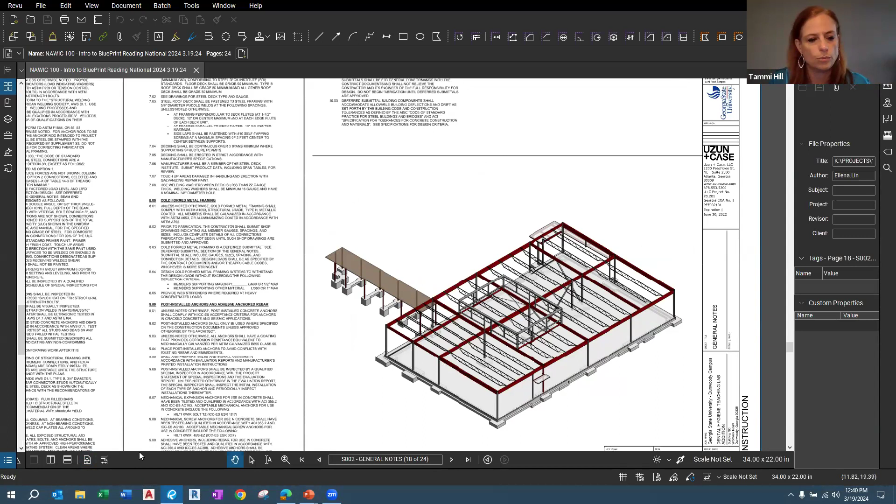So the structural engineer sets this, gets input from the architect to coordinate how the whole building is going to be laid out. But the structural engineer really owns that grid system and that dimensional control of the building because they're the ones that are engineering those columns.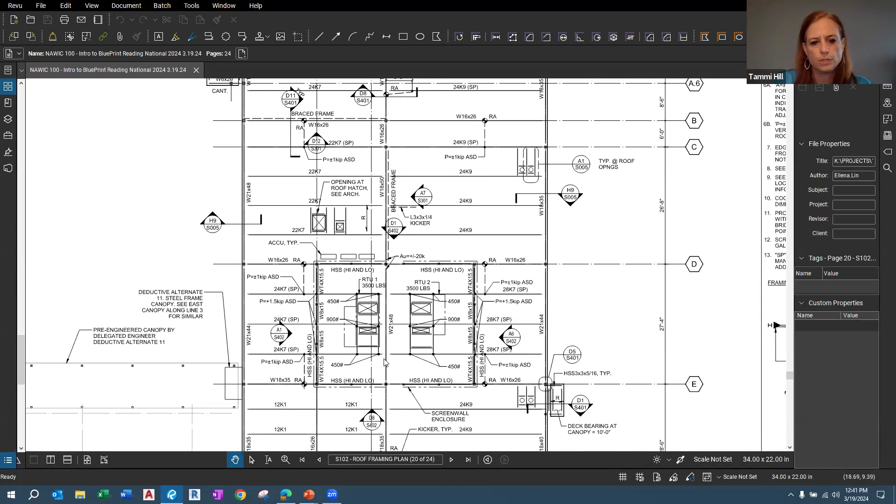So on our framing plan, this is going to be our roof framing plan. So we're seeing what's holding that structure up above. We're going to see some notes that refer to the different types of framing members. And if we go back to our axonometric view, we can see our framing members here running across the page. We've got some beams, we've got some joists. It looks like we've got some other types of members here. Not sure what those are, but we can go to our framing plan and we can figure that out.

So the information that we get here, our beams are typically going to be noted with a W. That's called a wide flange beam. So we'll see a W designation for beams. Joists are denoted typically with a K. There's a K series joist. You may also see an LH, which would be a long span joist. But those are going to be typically your joists.

And then we're going to see this other member. Wasn't sure what that was, but now that I'm looking at our plan, I can see it's designated as an HSS. And I can go back to my abbreviations page and see that that stands for hollow structural section. So that's typically some type of tube steel.

So now we know what kind of members we have, but we also want to know what size they are. So the first number in each of our member sizes is typically going to be our depth of the structure. So we know, for example, this is a 16-inch deep wide flange. We know our first number is a 24. That's a 24-inch joist that's running across. Not sure what our HSS members are, but I can see we've got some additional detail and information. I could click on this and it will probably tell me what size those members are.

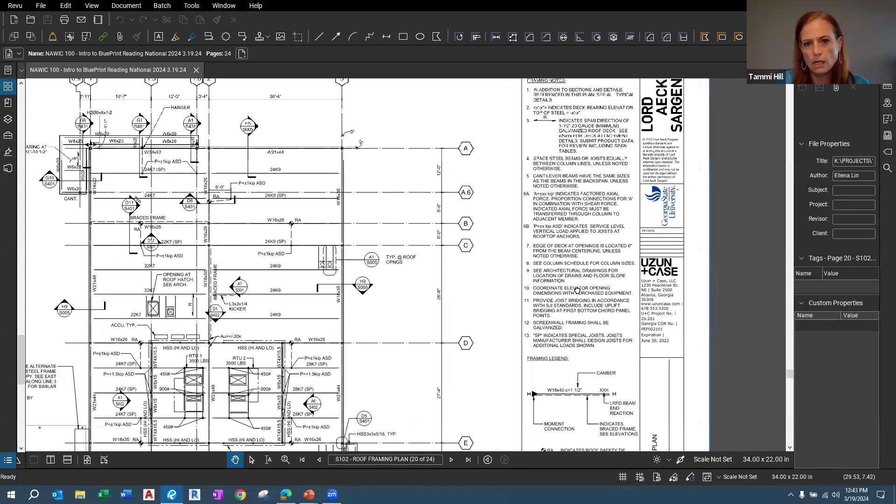We have information about our roof deck. And it looks pretty simple, but what this is telling us is that our roof deck is spanning in this direction and it's an R. So I would bet we could come over here, either to our abbreviation page or, nope, right here, here's our special note that's sheet specific that tells us our R. It tells us all the information about our deck, what type of deck it is, it's galvanized. So a lot of information there.

The other thing that this is going to show us is where our loads are on the structure. So it's going to give us actual loads. So we know we have an RTU here that's 3,500 pounds that the structure has to support. I know if I go and look at my abbreviation page, RTU stands for rooftop unit. So I know we have some mechanical equipment sitting up on the roof. It's 3,500 pounds and we have some point loads of 450 pounds and 900 pounds.

So the structural engineer is going to take all of that loading into account as they're designing the structure. But it's important to know where those loads, specific individual loads, are being placed on that building. So those are going to be either things that are sitting on the structure or things that are hanging from the structure that the engineer has to account for.

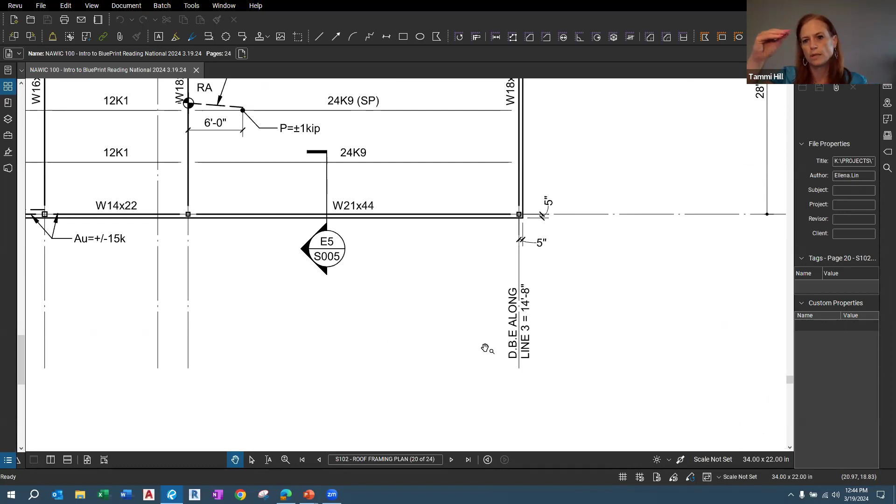We're also going to see on this plan what our elevations are. So how tall is this building? So we can see here, we've got a DBE along this column line of 14'8". Again, I can go to my abbreviations page. I can see that DBE is deck bearing elevation. So I know that's where the bottom of that roof deck is sitting on top of the structure. So it's 14'8" here, but over here, it looks like it's 16'1".

So these two are at different elevations. So this one is higher than this one. So that gives me the clue that my roof is sloping down in this direction from left to right. So if I look at my architectural elevations, I'm not going to be surprised to see gutters and downspouts along this side because I know my roof is sloping, so my water is going to be running off the roof in this direction.

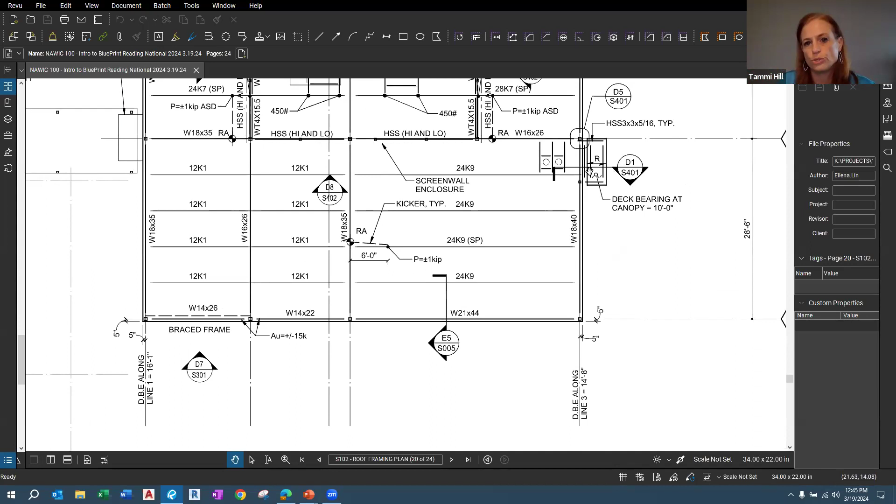We may also have specific components where it's just noted. This is what our elevation is. We have a little deck, roof deck, probably a canopy over an entrance door. So it's giving us information about that as well.

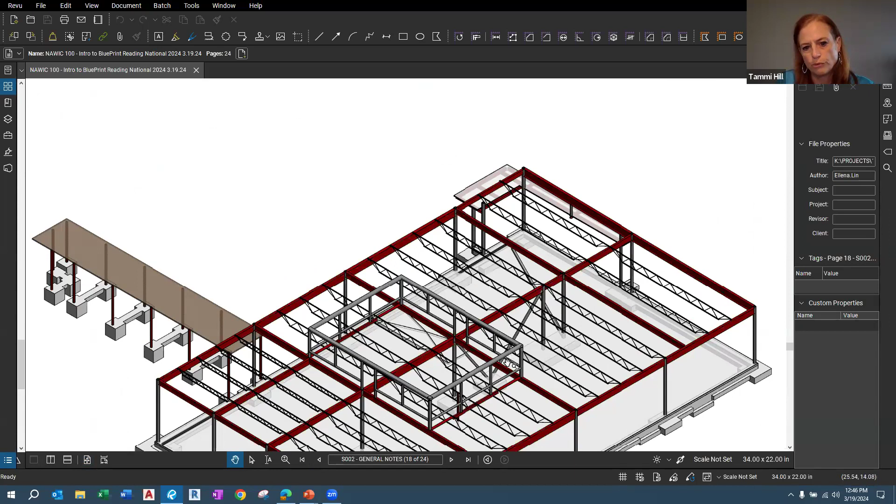All right, so let's go back to our bracing because we know we have an element here. We could see it in our axonometric section. Oop, I'm going down, sorry, gotta go back up. There we go. So we can see that bracing. So we've got a couple of members that are sort of going diagonally from the roof member framing down to the foundation. That's, again, keeping that lateral stability.

Oh goodness, that's no good. Sorry. I'll get that to go. There we go. Sorry about that.

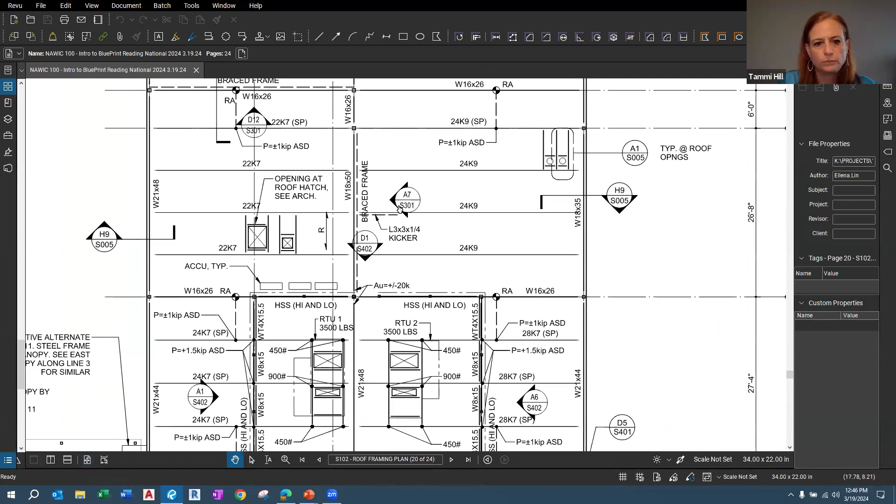Okay, so we don't know what that bracing is, but again, we can go to our enlarged view. We can click on that. We can see that A7, here's our braced frame. Now we get our member size. So we know it's a hollow steel section, it's tube steel. We know it's 5 by 5. And then we've got some additional loading information.

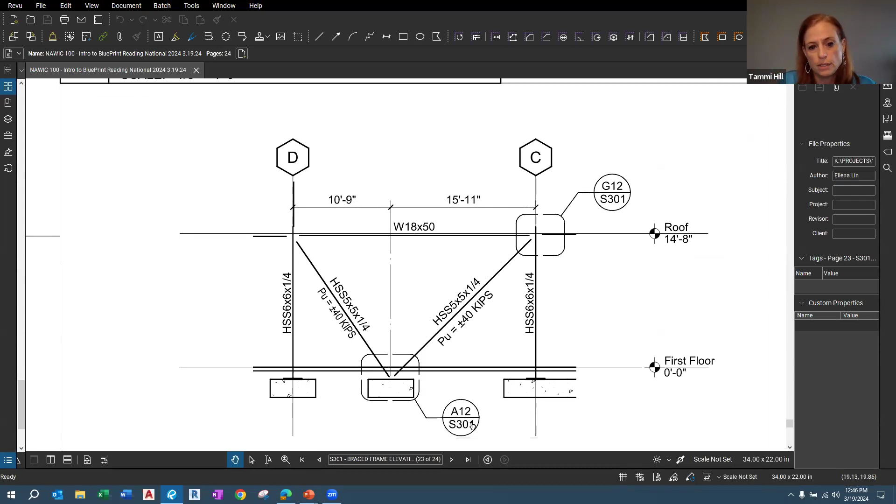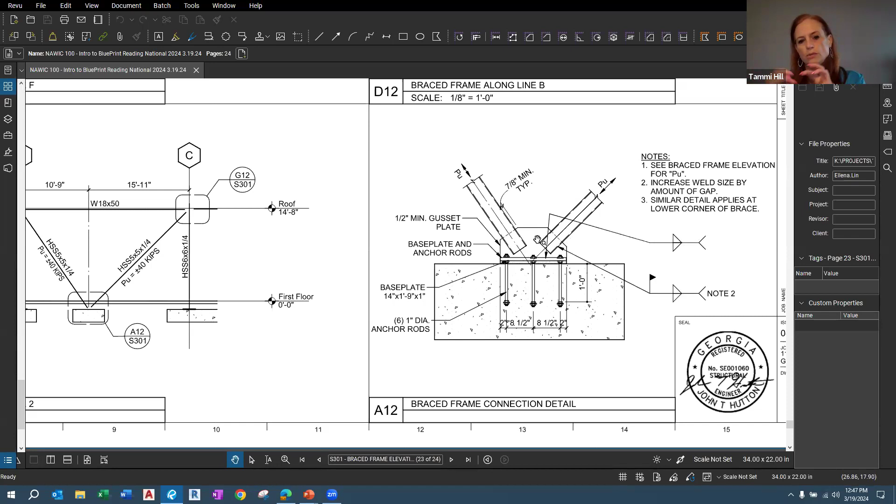Looking again, we have even more information. We can get even more granular in the structural drawings. We can see that's A12 S301. Well, we're already on S301. Here's our A12. So we can see a really granular detail about how all that is connected. We can see where our anchor rods are. We can see where our base plate is. We can look back at the symbol sheet for the structural drawings and see that these are weld symbols. So we know that some things are being welded together here. So this gives information on how those pieces are coming together, how they're going to be installed.

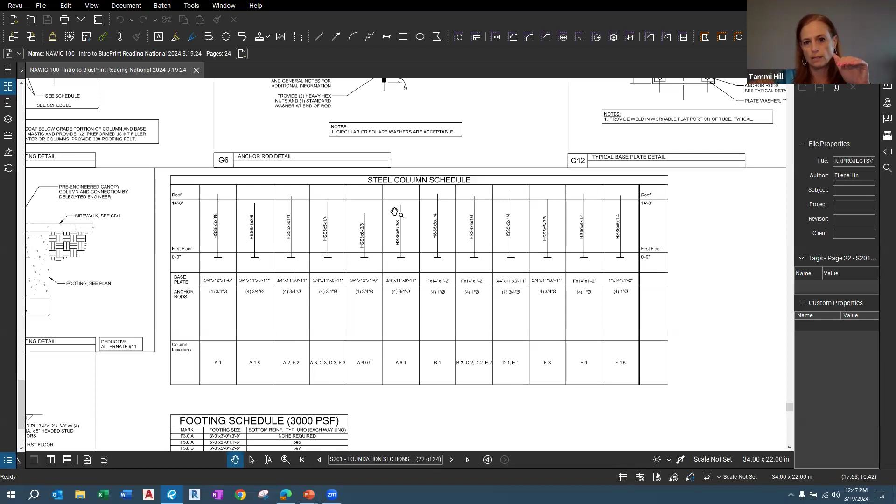We talked a little bit about schedules for the architectural drawing. I did want to point out, again, each discipline is going to have some schedules that are scheduling specific components. So here we're actually having all the steel columns scheduled. So we know what the roof elevation is. We can see the columns and where they sit above that elevation. Remember, on that elevation, we had 14'8" on one side and 16'1" on the other. So we know there was some sloping, so we can see which columns are which. And we can also see what base plate and anchor rods go with each of those columns. So we've got some more detailed information about those specific components here.

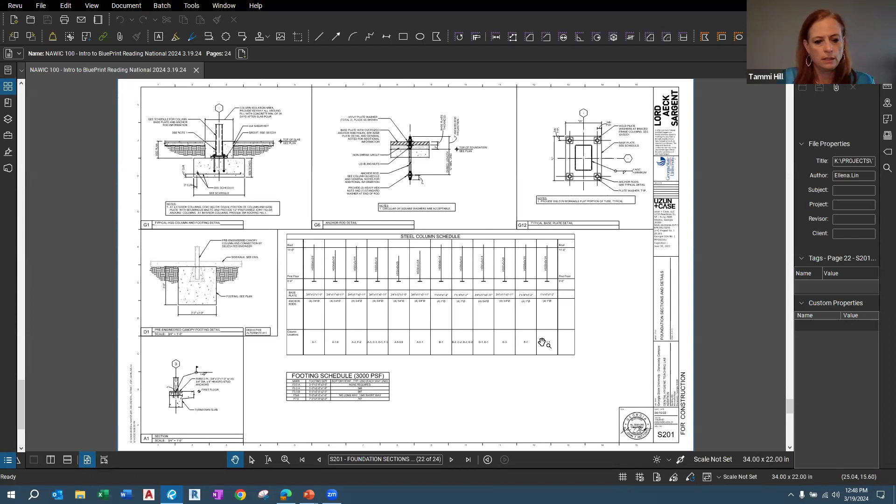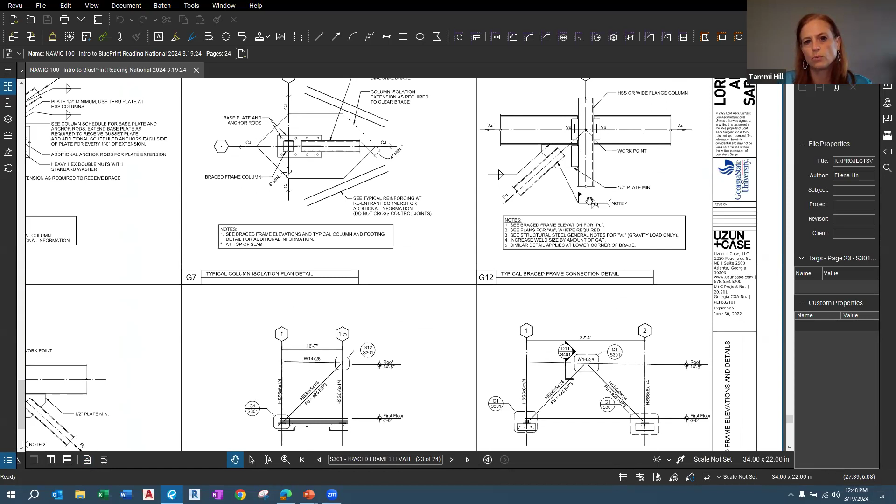And again, we have more specific details. So you'll see some foundation details, and then you'll see details for how those roof members come together. Whether they're going to be some bolted connections, which we can see called out, or again, we've got some welds, so we know those pieces are being welded together. So that's kind of an overview of the architectural and structural components.

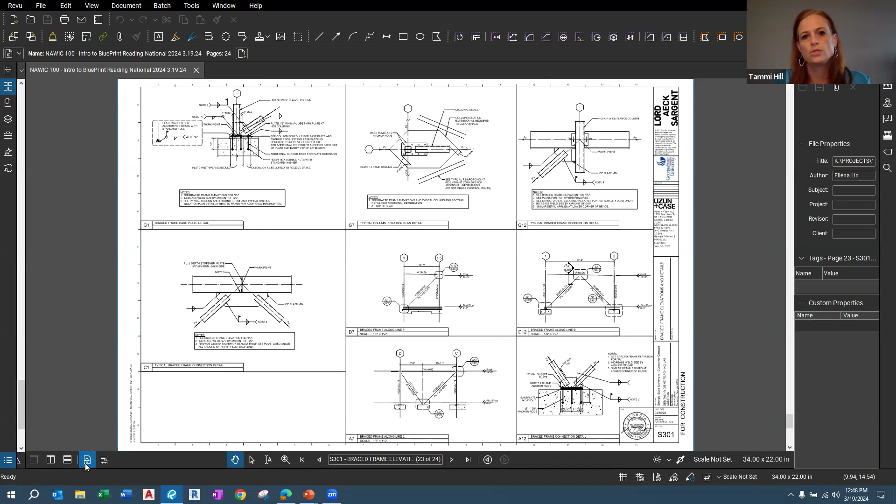To wrap up, I really wanted to highlight a couple of what I think are the key takeaways. It's important when you're reading the drawings that they're taken as a whole. So your architectural drawings are going to be referencing your structural, and your structural are going to be referencing your architectural. We saw some mechanical information on the roof plan or the structural framing plan. So we can go to the mechanical drawings to look at that. So you've got to really take everything as a whole to give you that full picture of what's going on in the building and how it's all coming together.

And again, when it seems really overwhelming and there's so much information on that sheet, just take it piece by piece. Look at that in large detail, kind of get granular on that, then come back to the overview and take another piece and kind of work it through. And that'll give you an easy way to sort of see how all those different pieces are coming together, and allow yourself that time to flip back and forth between the drawings.

Keep multiple windows open if you need. If you've got two screens, it's not uncommon for me as I'm looking through plans to have two different versions of Bluebeam open with two different disciplines so that I can be looking back and forth. And always remember to check not only the abbreviation sheets, but look for those additional Where's Waldo clues on those specific sheets for your specific legends, your specific keynotes, and then your project specific notes.